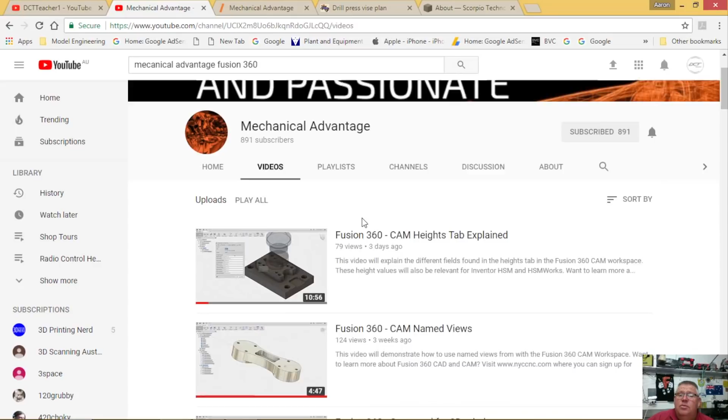So Kevin also has a website. What we're going to do together with Kevin and myself: I'll teach you how to draw this in CAD. Kevin's channel will take it back to his channel and he'll show you how to cam this. It will come back to my channel and we'll CNC machine this either on the Skyfire here or I'll go to work and CNC machine it on the Haas.

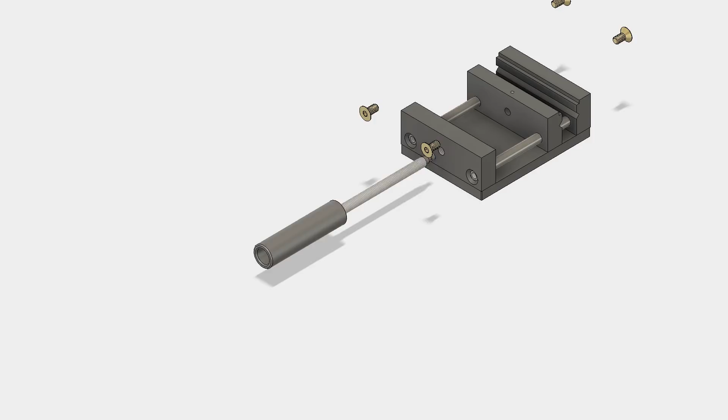Okay, let's get started. Step 1 will be drawing the base. Step 2 will be drawing the fixed jaw, the front. Step 3 will be the rear jaw, sliding jaw, and then the two rails.

So let's get started, we're going to open a new design. Before we start, I want to ensure that you're pretty much following me step by step. I like to design in Z-up, you can see here I've got my Z-up. And I also like to document my units in millimeters, okay, not imperial.

So what we're going to do now is click Save, and I'm going to make sure I'm saving this in my Fusion Fortnight folder. And there it is there. We're going to title this one CNC Vice.

Save it. Okay, straight off the bat here, guys, we're going to design a little bit differently to what I've usually been doing, and I need to credit Scott Moyse for showing me this tip. I'll put a link to Scott's video down in my description file. I highly recommend you watch it. It'll be the best 40-minute session of Fusion 360 tips you'll ever see in your life. So it's certainly changed the way that I've designed now with Fusion 360.

So we're going to create an assembly straight off the bat. Each time I create a new assembly, I'm going to make sure that I'm creating it under this parent file here. And I'm going to name my first component base.

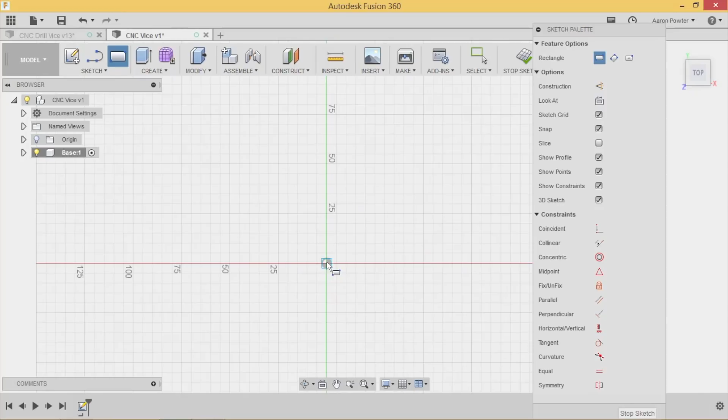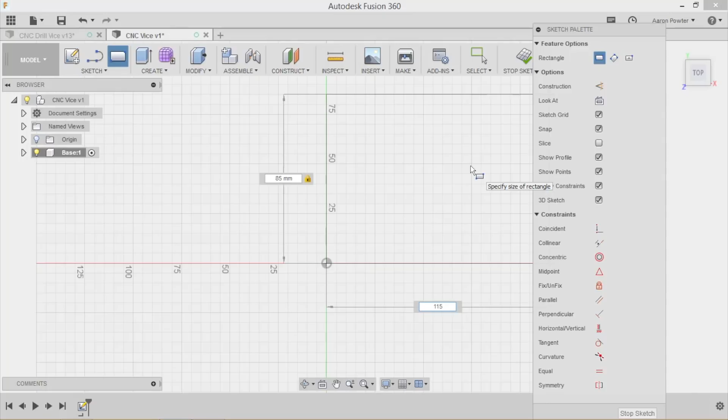So we're going to create a new sketch, click the ground plane, R for rectangle, and I'm going to be moving rather quickly throughout this video. So if you get stuck, just remember to pause the video, rewind it, and catch up that way. Before I terminate that rectangle, I'm going to type in my dimensions: it's going to be 85 millimeters wide, 115 millimeters long, and enter. E for extrude, click the top face, 8 millimeters, up we go.

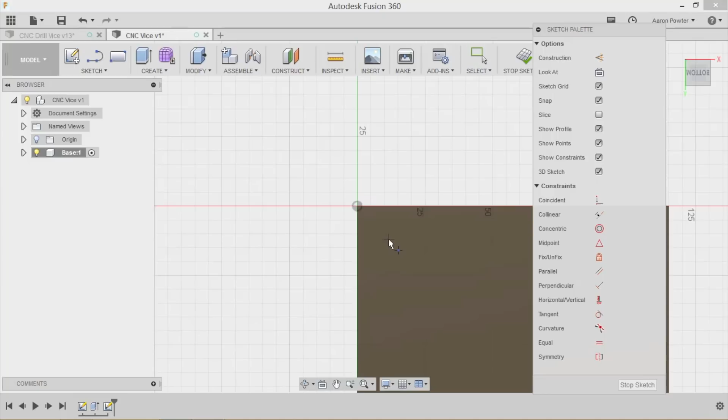I'm going to view onto the top view now and orientate it around to the bottom view. By using my scroll wheel, I can click and drag, and I can also zoom in and zoom out. I'm going to put some points on here now, so I select that face, expand the sketch drop-down section, click points. We're going to put 4 points on here, okay, just random points, 2, 3, 4.

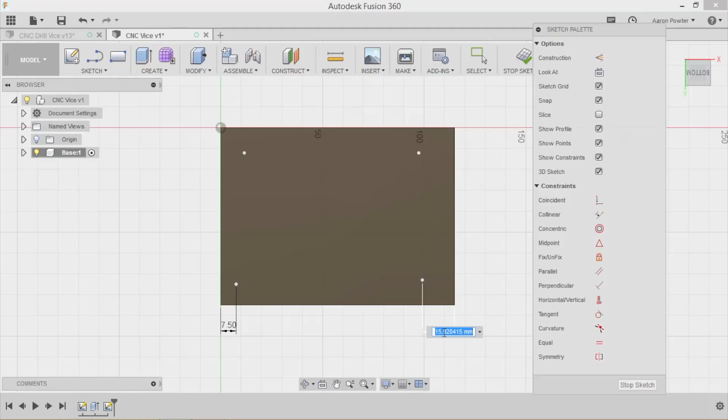And now let's lock these down with some dimensions. So D for dimension, and we're going to start just on this outside line here and coming down, and this will be 7.5. Let's apply that to the other side as well, 7.5. Okay, so now from the bottom line to that one out, that's going to be 17.5. And from this one here, escape, D for dimension, from that point to that point will be 50.

Now I'll tidy some of these up so you can see them better in the video. Okay, now you can see one of these points here is black. That means it's fully defined and will not move. The other ones you can see I can move them around, so we need to fix that.

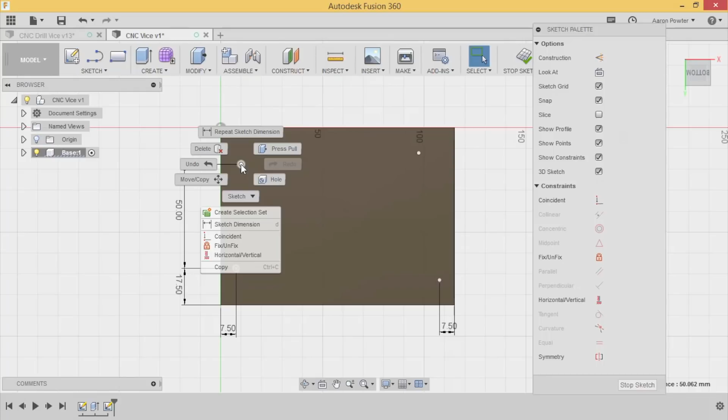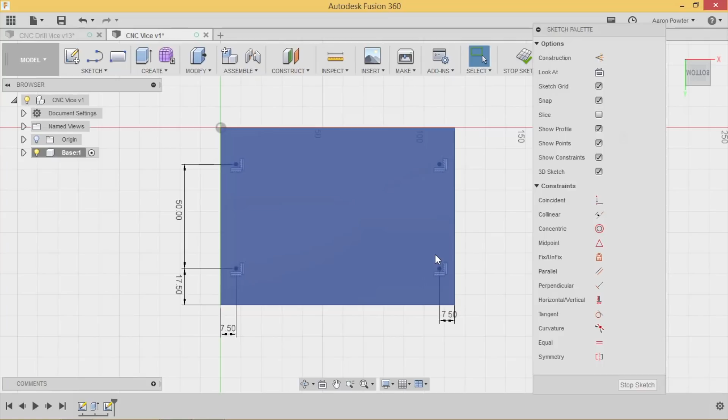I'm going to click that point, hold shift, click that point, right click and go horizontal vertical. Now that's turned black. I'll pick this one, shift, click that one, horizontal vertical. I'll align this one as well. Now you see I've got 3 out of 4 fully defined. The 4th one can still move here, but not up and down. So I'll click this one, hold shift, click that one, right click, horizontal vertical, and now these constraints are applied and they will not move.

We're going to use the create function here, click hole. In your hole, you want to make sure you pick multiple, okay? Come down, we want countersunk or countersink. Here we go, guys, we're going to click this one - 1, 2, 3, 4. Now the hole depth will be the thickness of the plate, so that'll be 8 mil.

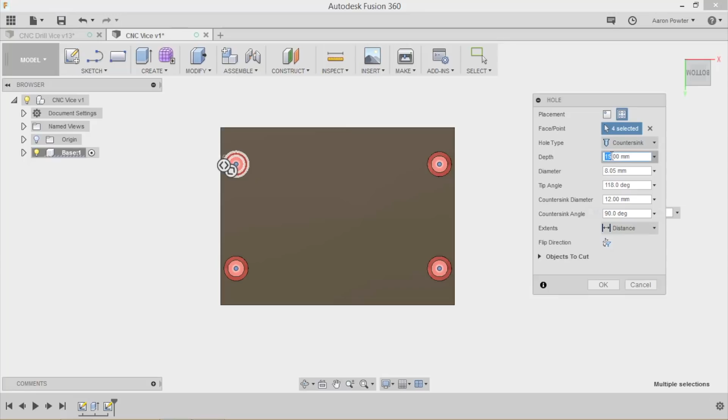The diameter here will be 8. The countersink diameter will be 12. Just check it as you come through - it's a 90 degree countersink, and we're going to click OK. You can see it is applied now.

I'm ready to go. Click save, guys. Okay, so we're ready now to start on the fixed jaw, the front fixed jaw.

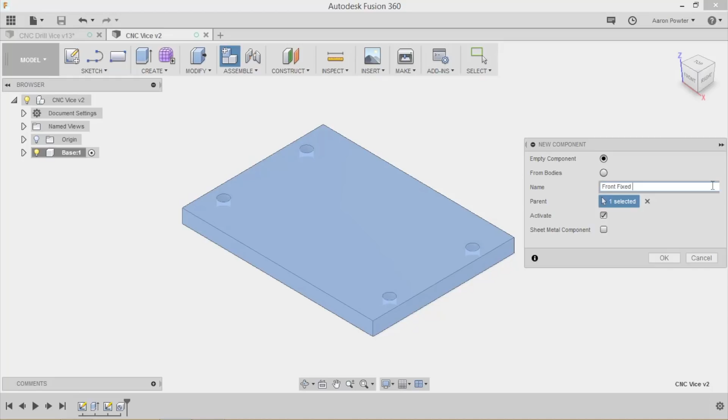To do that, we need to click create a new component. Now remember, where we see at the moment, it's selected the base here. I'm not going to do that. If I was doing sub-assemblies, I'd leave that. I close that, come back up to this top level here to CNC Vice the actual master file. Now I'm going to name it front fixed jaw and click OK.

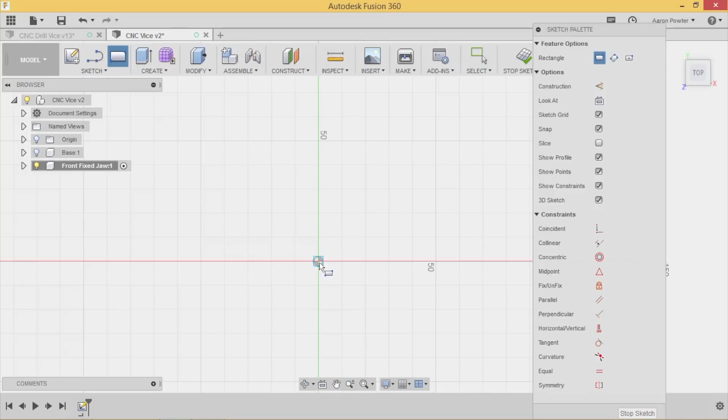Okay, so now I'm just going to turn off this, at the moment it doesn't really matter. Click a new sketch, click off that light bulb, click off the base so we can see what we're doing here. We're going to do R for rectangle and come up this way. This is going to be 85 millimeters long by 15 mil. Tab, enter, E for extrusion, click that, it's going to be 30 millimeters upright.

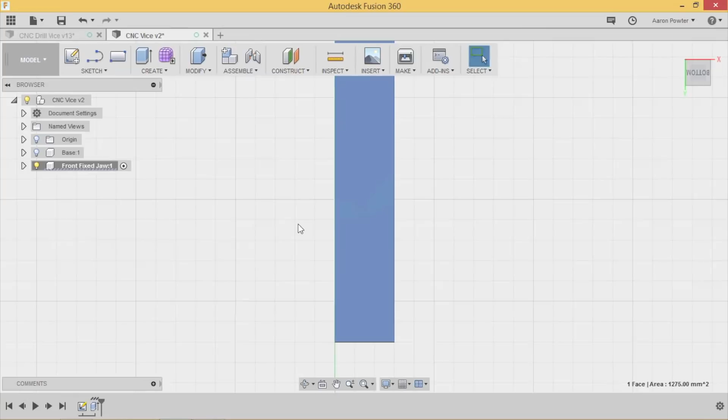We're going to come around now, guys, and underneath here I want to get to the base and put 2 holes in here, alright? So I'm going to click that face and it turns blue - notice that, click the face, turns blue, C for circle, and there you go. It's spun the other way on me, but that doesn't matter, we'll just carry on here, like that. I'll rotate that for a second so it's easier to see in landscape view.

D for dimension, distance between the holes - that's going to be 50 to match the base. Okay, from this edge to that edge, to the dot, to the center of the hole, that's going to be 17.5.

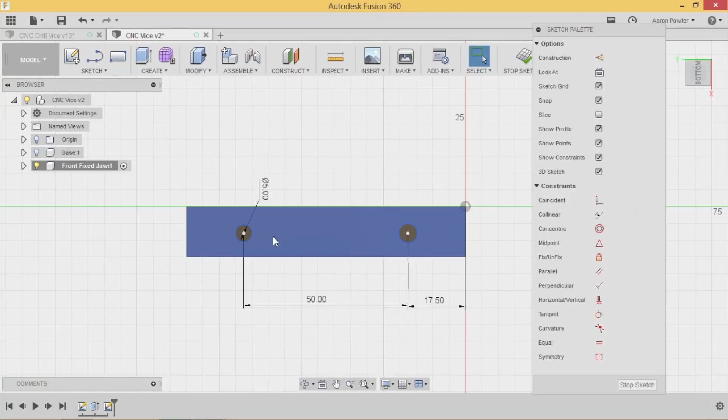Now we need to dimension the hole. Because it's going to be a threaded hole at 6 millimeters metric, we want a 5 mil diameter, and I'm not going to dimension this one. I'm just going to put a relationship between the two. I pick that outside diameter, hold my shift key, pick that outside diameter, we want equals, and you'll see now they're both right. But there's one thing I haven't done.

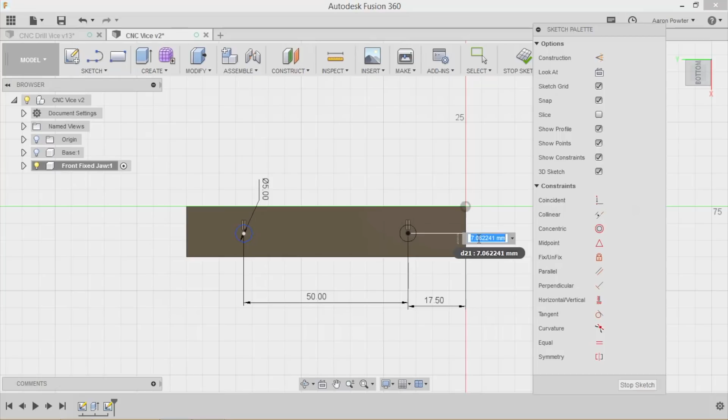You'll notice these dots in the center of the circle are still white. That means if I grab them, I can move them up and down. So let's lock this one down here. That should be 7.5 because it's half of 15. Now you'll see that it's fully defined, it's gone black. So I'm going to pick that center, hold shift, pick that one, right click, horizontal vertical, bang. Let's tidy up my dimensions.

Okay, E for extrusion, I'm going to pick this hole and that hole. Going back to my home view, my ISO view, and I'm going to go negative 15.

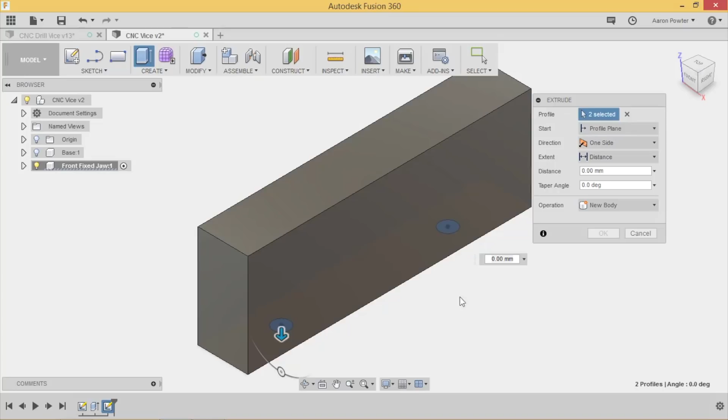-15, and there we have it. Now if I come underneath here, you can see I've got the 2 holes, but we need to thread those, okay? So here we go.

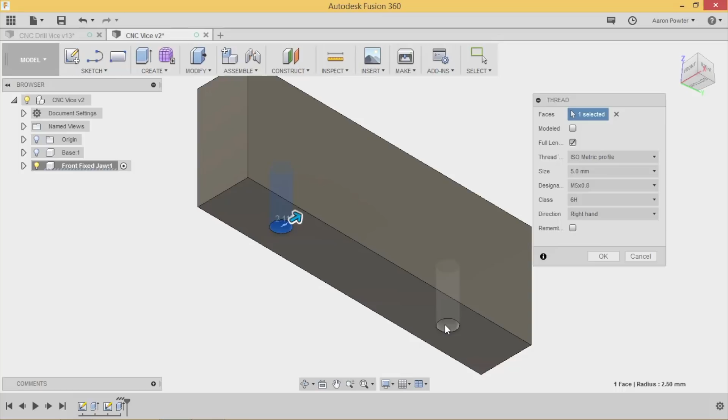We're going to create a thread. We're going to pick that one. Notice I can't pick this one here, but if I hold my control key, I can. See that? I can't select it. Control key down, bang, got it. We're going to make sure this is metric. As we come down, ISO metric profile, 5mm, M5x0.8, right-handed thread. Click OK. I just want that cosmetic thread, I don't actually want it to show the actual revolved cut thread there.

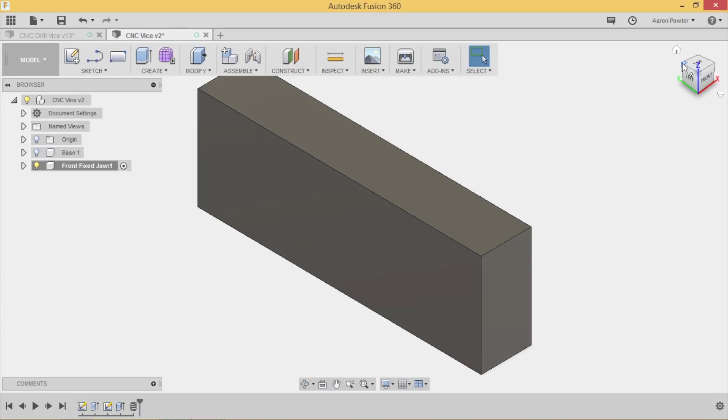Back to my home view. Now I'm going to come around to my left side, and I'm going to start with my 2 countersunks on this one here, and you can see it here, guys. I'm drawing this fixed jaw, and I want those countersunk features put on there. So here we go.

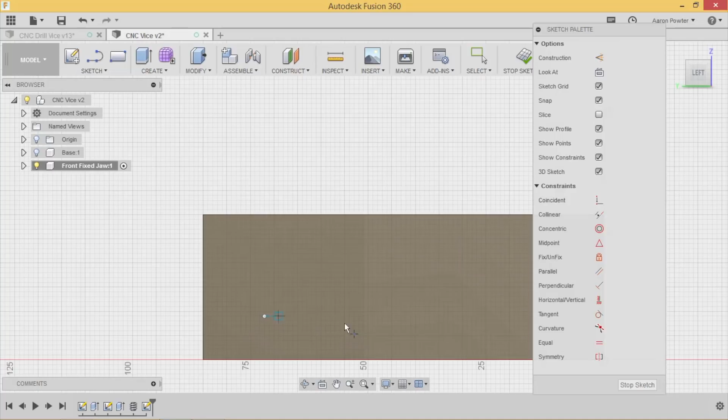I've selected that front face, and I'm going to use 2 points again. I find working with points a lot easier to do and to manage with these countersunk holes. So from here, that's going to be 10mm, put a dimension on there, D for dimension, click the edge and click out. From point to point now, yeah, it's going to be 65.

Now, if you're making this manually, measuring it out and center punching it on the workbench, that sort of thing, this is poor designing, okay? You'd always measure from a datum and come across, but being in CAD, guys, it's that accurate. We can pick point to point here, it's not a problem. Bottom of the line to that point there, and that's going to be 8mm. You can see that black dot there that's changed.

Now, Lars points this out all the time in his videos, guys, make sure you fully define your sketches, all right? So click that dot, hold the shift key, click that dot, right click, horizontal vertical, boom, they're locked down. Once again, let's put 2 countersunk holes on there.

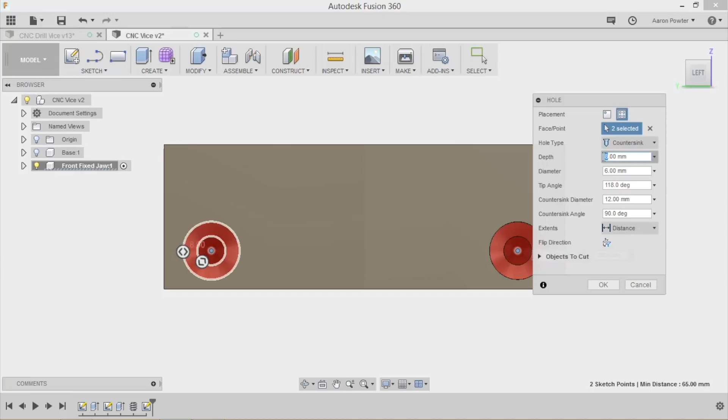So we go hole option, multiple countersunk. I'm going to pick that one and that one. Now, a few things have to change here. The hole depth will be 15. The diameter here will be 8.05.

Don't you love metric? Kevin, my good friend Kevin Ellingson, if you're watching, one day, mate, you'll see the light and you'll come over to the dark side and over to the metric system.

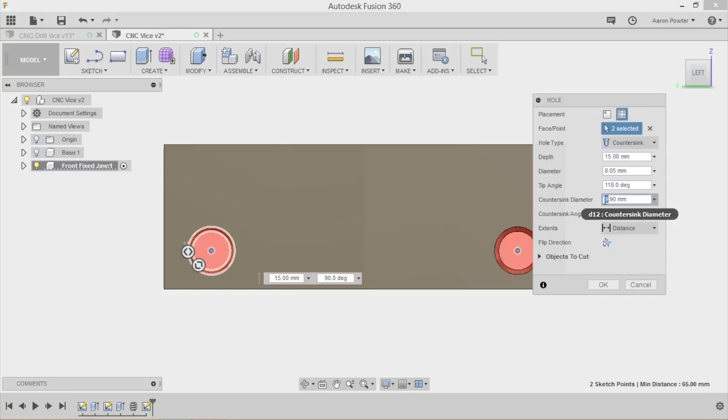For those of you that don't know, Kevin runs a channel called Mechanical Advantage, and he'll be helping us with this project doing the cam, and then it will come back to me, and we'll collaborate on this video, and I'll CNC machine it. Okay, guys, so I'm pretty happy with that.

And boom, there we have it. You can see here, but what's missing? If you look here, I need this threaded hole here. This is where my threaded shaft will come through and actually push on the sliding jaw and shut it. Just so you can see that, if I expand this, guys, and just go animate joint here, you can see that that's how I want that part to interact with myself, in my project.

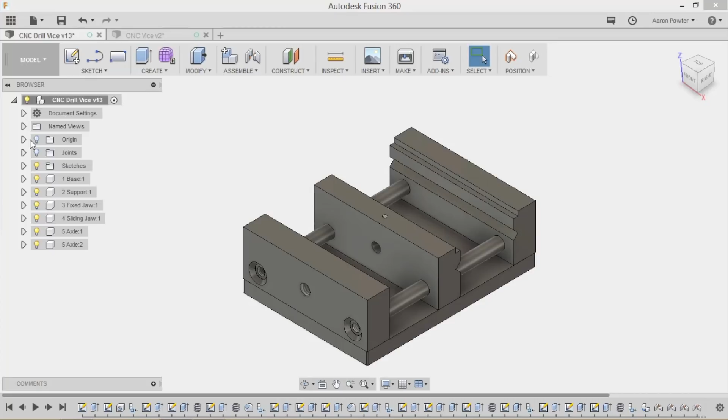Okay, so back up here, guys. Now remember, keep saving along the way.

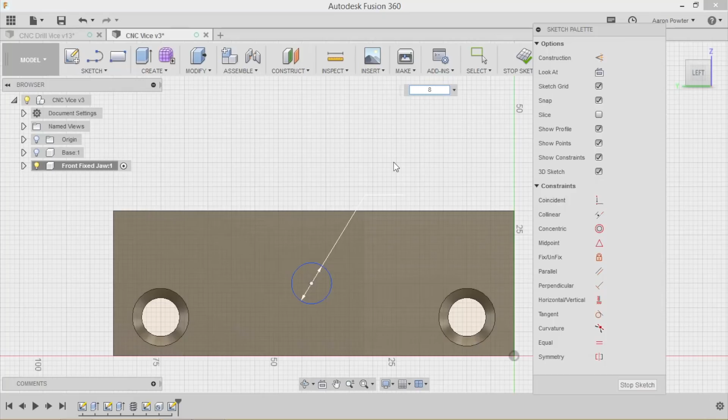Come back around to this left-hand view and select that face. We want C for circle, and we just want to put a circle right there. D for dimension, this will be 8mm metric thread. The pitch is 1.25, so 8 subtract the math here, if you don't want to do it in your head, 1.25, which should be 6.75 actually. Boom, 6.75. Gotta love Fusion.

It's fantastic, guys, I'm telling you what. I seem to be, how would you say it, an Autodesk Fusion 360 groupie these days. My wife says I've got a boring life, but anyway, I think I'm having great fun.

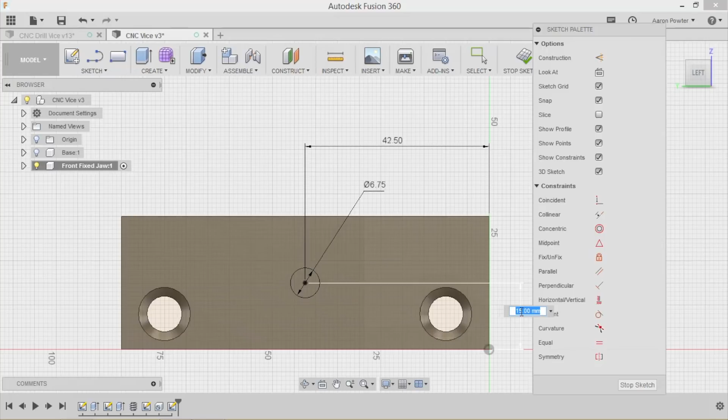42.5, guys, for the center of that hole, and we're going to have about 15mm up from the bottom here, and boom, spot on. E for extrude. I'm going to punch that all the way through. You can type in the value if you want, but I'm just going to pull it out till it goes -15, and it's a cut.

One more time, create a thread, ISO 8mm, 1.25 pitch. Boom, we've got it here. So that part's now complete.

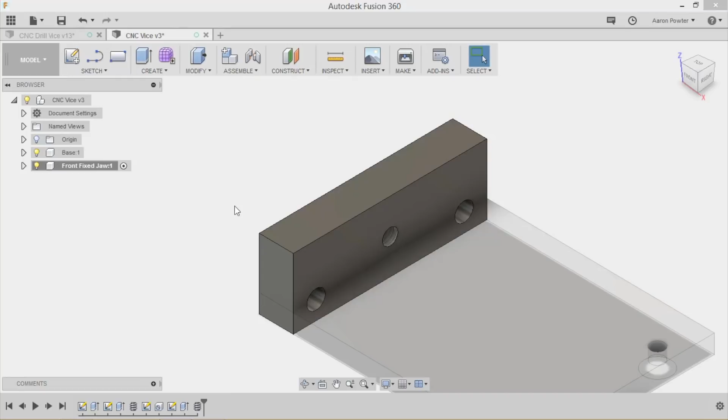Okay, so watch this, make sure you save it. Now the reason I'm getting you to design this way, creating your components as you go, there is a method behind my madness, guys, I can tell you. Now watch this.

If you come up to inspect and click component color cycle, you can also do this by Shift N, you can turn them on and off. How cool is that?

Now look down in your timeline. It will tell you where you started and show you which part is which. Now have a look over here - I didn't do this, and you can see it's this mess right across here. So thank you, Scott Moyse, for pointing that out. It's very handy.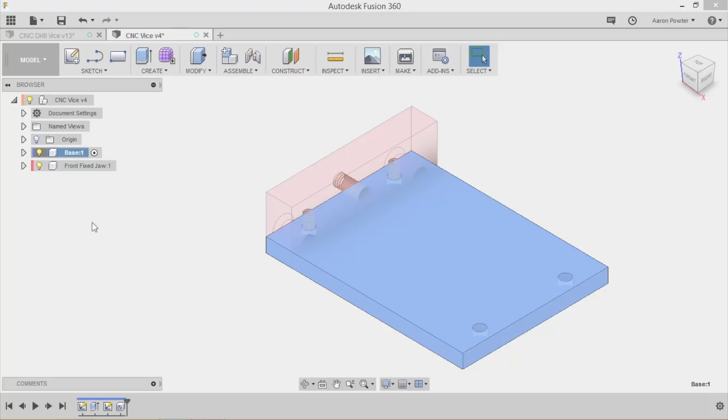Watch the fixed jaw, activate it, bang - everything is contained within that component. Anytime I want to go back and make changes, it makes it so much easier than trying to find your timeline down here and go, where the hell did I, where does this belong?

So yeah, thank you, Scott, for showing the error in my ways. Okay, so now that we've got the base and the first fixed jaw completed, we don't have to keep drawing these.

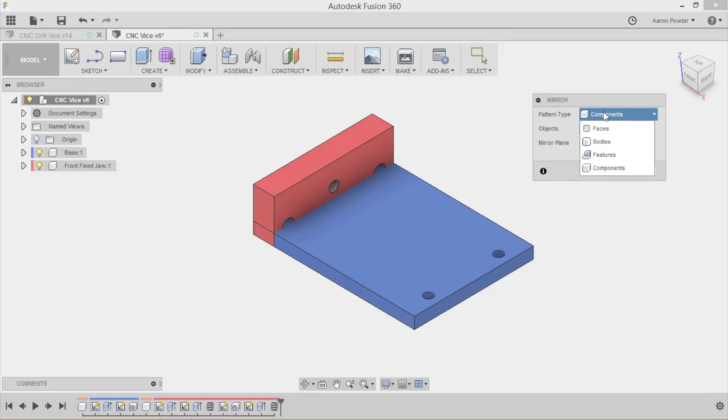We can actually start mirroring them. So what we're going to do is come up here to create, and I'm going to select mirror. In objects, I'm going to pick components, then pick this one here. Mirror plane, I'm just going to select that plane there and click OK. You can see my new component here - it's a different color, so I'm going to toggle that off. Remember, Shift N to toggle on and off.

So what I'm going to do now, guys, is turn the light bulb off on those other two to get rid of that. And here's my other fixed jaw, which will go to the rear of the vise. Now we don't need this hole in here, so I can click this here and delete it.

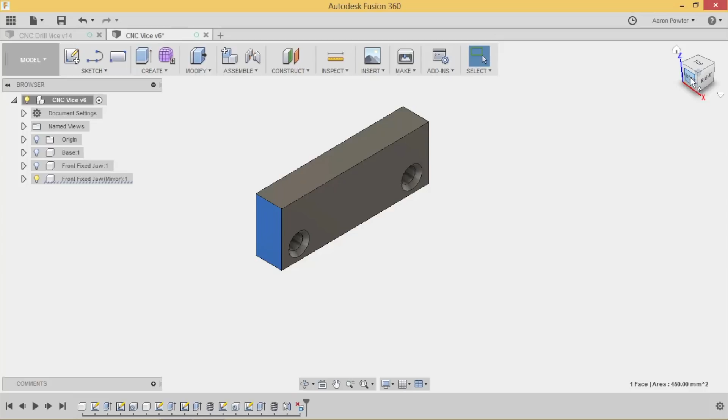We now need to put these little cutouts on here. So we're going to pick this face here, zoom in on the side, and turn on R for rectangle. We're going to go 3, tab, 3, tab, enter.

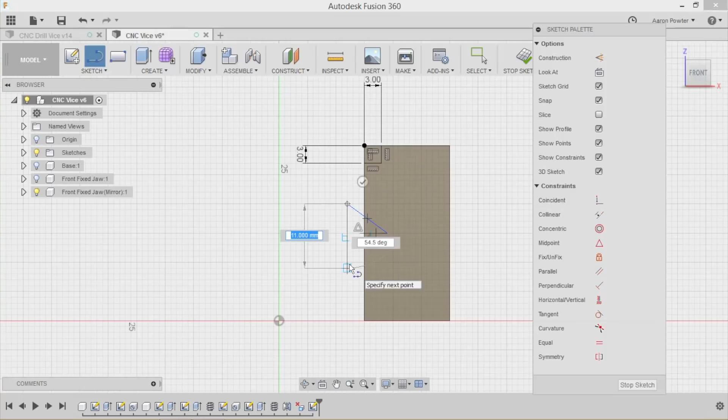From the center here, we're going to do a center line - just want to make a little V out to there, out, down and back, and put some dimensions on this. The center line there, I want roughly about 3 millimeters long as well. Oopsie daisy, we'll just edit that again, undo.

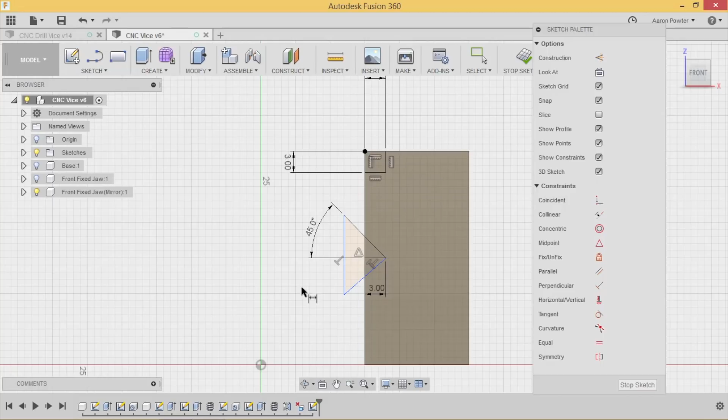That'll be 3. We need this one here to be 45 degrees, enter. And overall the degree will be 90 degrees from here, enter. Alright, so now we can extrude cut those all the way through.

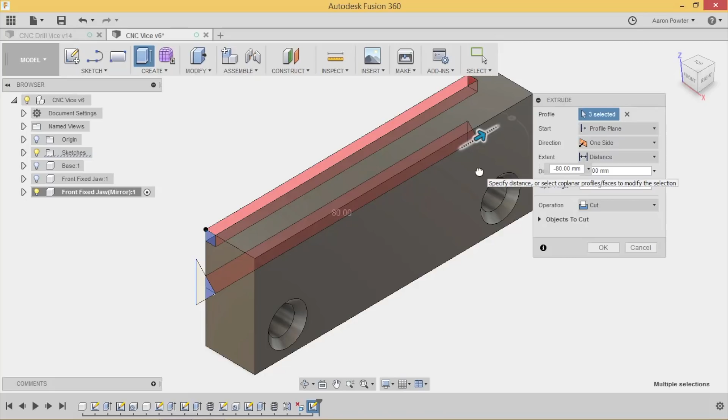So we're going to pick this shape here, bring it back up into our isometric view, and we want to go negative - I believe it's all the way through to 80. We can just check that by coming around, and we're clear. Click OK, back to our ISO view.

Click save. Now I can turn these lights back on here. You can see that I now have this fixed jaw for the other side done.

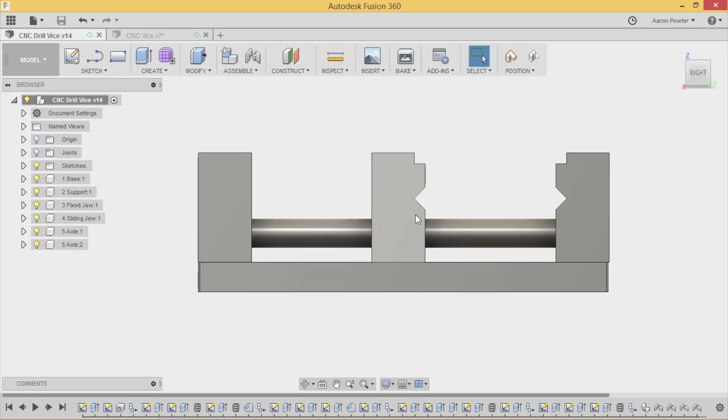Now what we can do is create a mirror of this one, and this will be our sliding jaw. So to have a look at this, you see we've got two fixed jaws, front and rear, and the middle sliding jaw, and that's going to be a mirror of this one.

And what we're going to have to do is just edit this hole a little bit, and it won't have a thread in it. So here we go - once again, create, mirror, pick this jaw. I'm going to come around for the mirror plane, want this face here, and click OK.

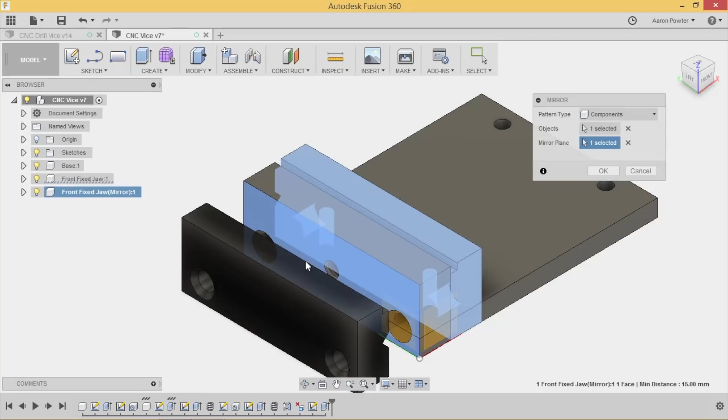Click on that face, C for circle, and we're just going to put a circle. We're going to snap a circle to the center there, D for dimension, and come up here, and that's going to be about a 6 millimeter hole.

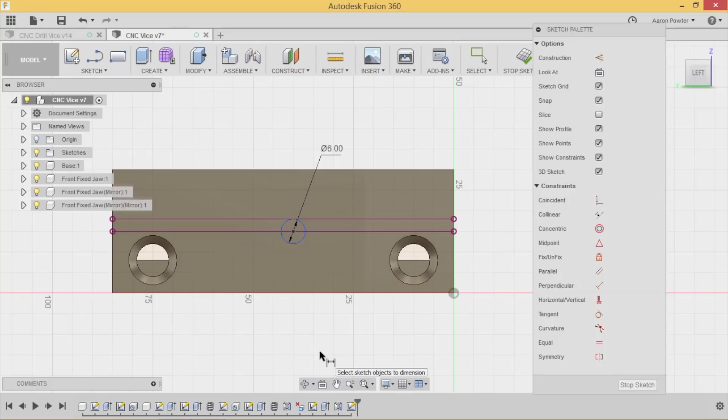And now we're going to use the center hole, so we need to center that hole in its location. From here, that will be 42.5, and to place it in the center as well, that will be 15. Oh yes, it's picked at the center, so okay.

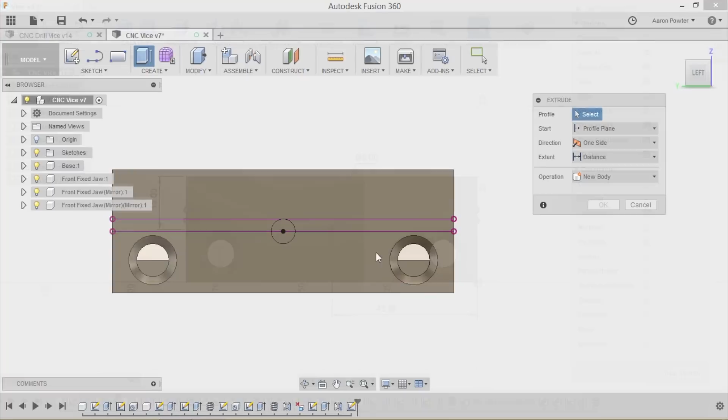E for extrude, we want this one here, and we're just going to go down in here for a second.

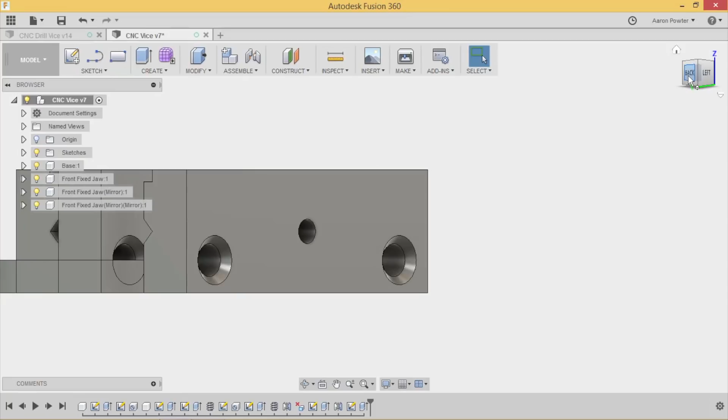And click OK. And there we have it, guys. So we just make sure that we haven't gone all the way through here. I think I have accidentally cut all the way through. Let's turn a couple of these off here just to make sure, and just view onto this front window here.

No, it's pretty safe, I can say now. If you wanted to check that, what you could do is come from here and turn on wireframe, so visual style with hidden, and you can see here that I'm quite away from that. So that's not too bad.

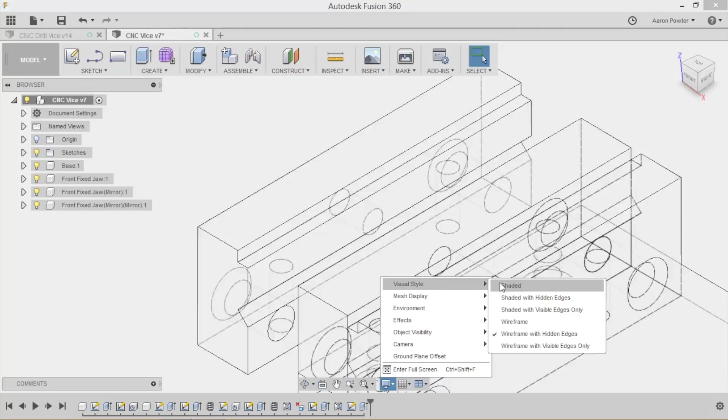Alrighty, so let's turn the wireframe back off now, and we'll go back to visual style shaded with visible edges. Okay, so we've fixed up our viewing. Now we can see everything here. If I want to toggle back on my components a different color, we can keep an eye on that.

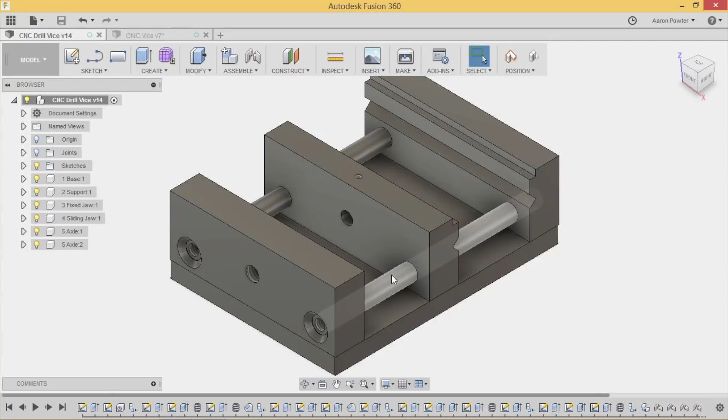So we need to create our axles here. Now they're going to be 111 millimeters long. So remember, once again, create a component, and I want it to stay under this design here, and this is going to be called axle. And create a sketch, and I'm going to turn these off just so they don't get in my way.

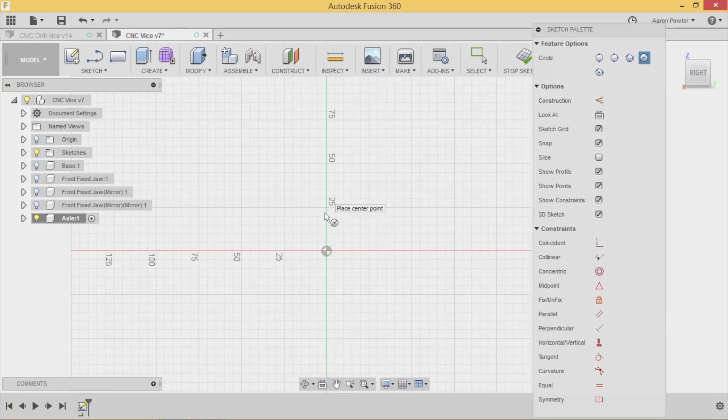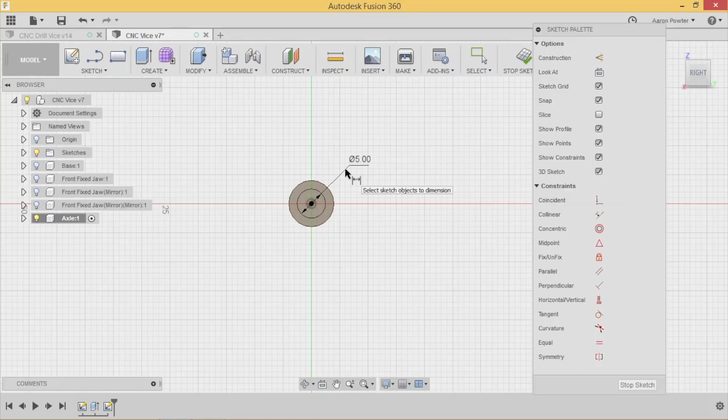C for circle, it's going to be 8 millimeter. Tab enter. E for extrude. 111. Enter. Click this front face. C for circle. And that's going to be a 6 mil tapped hole, so that'll be 5. E for extrude, and they'll go in -15.

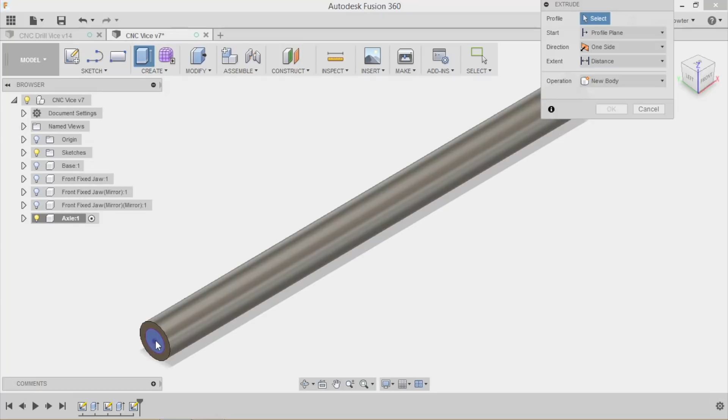And you want one of those on the other side as well. Five. E for extrude. And there would have been an easy way to do that. I should have done it like that.

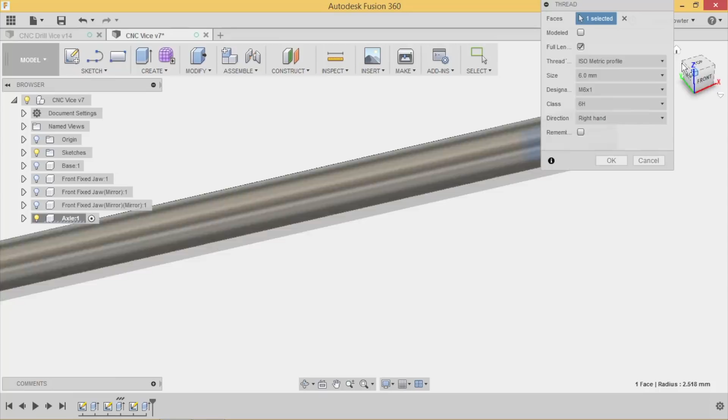Okay, so we're going to thread those now. Pick this one here, and metric M6 by 1 mil. Come around to the other side, hold my control key, and that will be the same. Click OK.

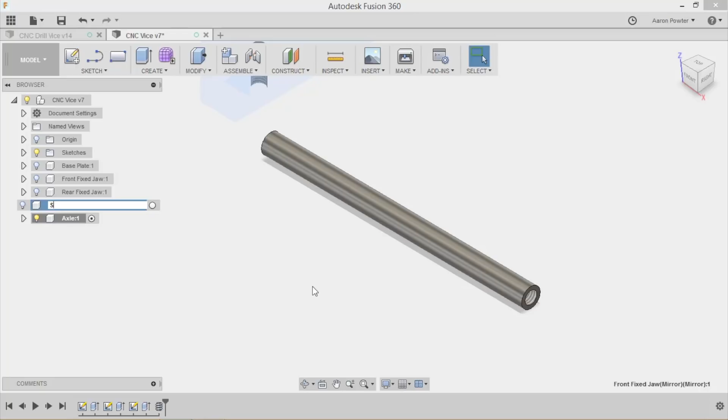So we need 2 of these axles. Before we do that though, let's just rename a couple of these. Okay, so we've got our base plate, a front fixed jaw, this one is our rear fixed jaw, and this one here is our sliding jaw. This will be axle 1.

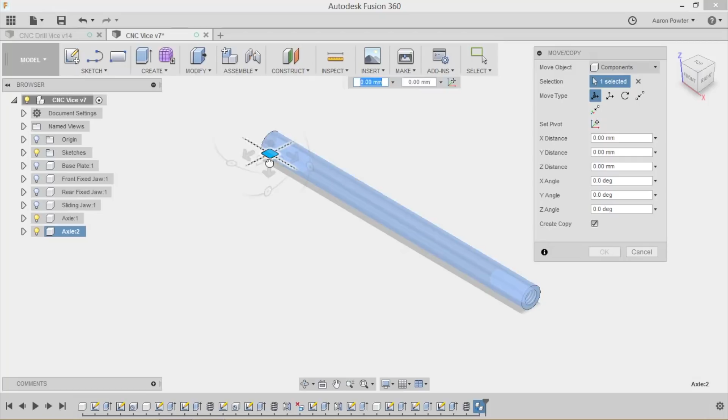Okay, to create a copy of this axle, we've got to deselect it. So we'll just go up to the top level here and select that. Now I can come down here and go move copy, component, you want to make sure we're picking this here, create a copy, and we're just going to pull it away, click OK, and you'll see it come up here now as axle 1 and 2.

Alrighty, so let's start assembling this. Now the best way to do this is turn on the front fixed jaw first. Okay, click joint. I'm going to orientate this around, and I want to get my coins coming up here, and I'm going to pick this front piece here.

Now, for component 2, we need to turn the base on, come back to my ISO view. I'm going to turn off my fixed jaw so I can see it. Here's my coins, they want to snap. Hold the control key, we want to snap it there. This will be a rigid joint, and you can see that there, that it's on.

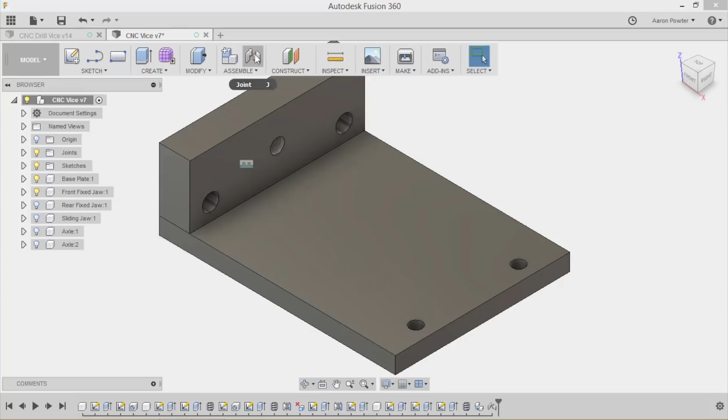We want to now fix this jaw here up this side here, so we're just going to repeat the process. Click joint, we're going to turn this one on. I'm going to turn the base off so I can see it. Orientate around, once again repeating what we've already done. Back up here, I'm going to turn my base plate on, and here's my coin, hold my control key, snap it down. It's going to be a rigid joint.

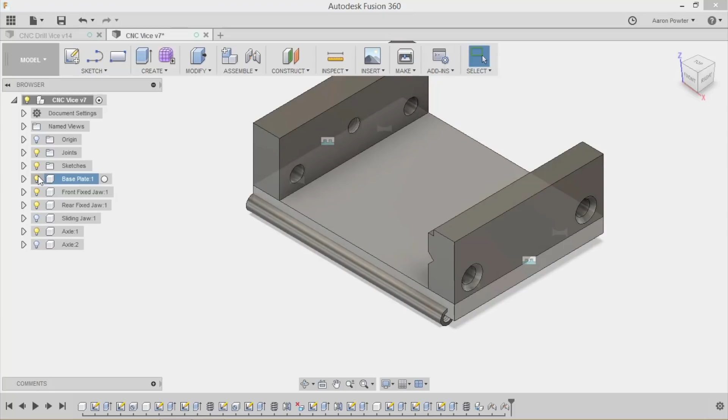Click OK. Okay, let's turn our axle on now. Let's put our axle in there. So you can see the base is hiding it, so let's turn the base off. Click joint, I'm going to touch this face here.

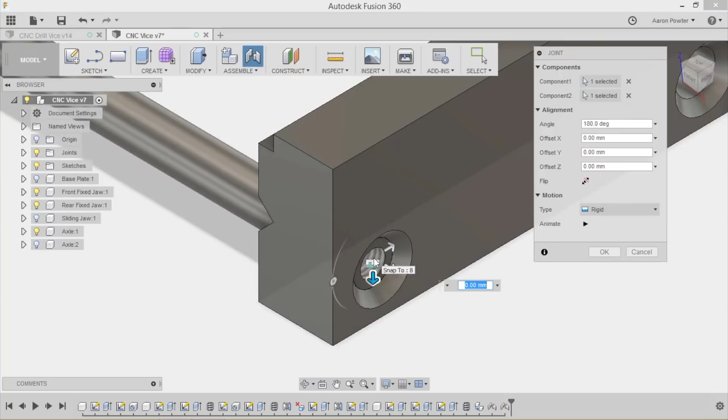Click joint, touch this face here, snap it to there. Here's my second one, and I want it to snap not there but there. Boom, there we have it. We're going to snap the other axle in now.

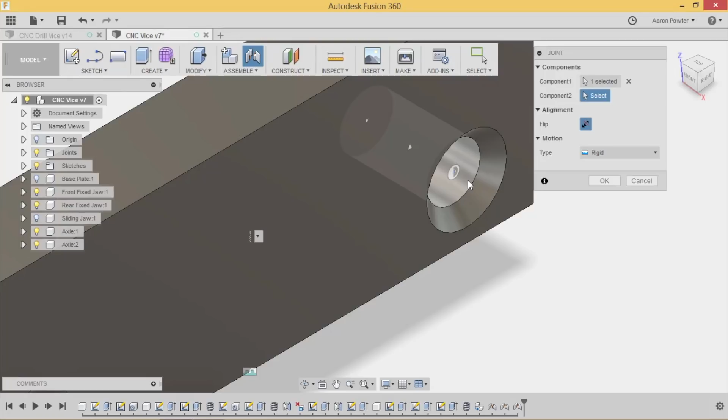Click joint, and touch that face, control key, come back out over to our other side, on the face there. If I just let go, I can see it, that's where I want it. Rigid joint as well. Turn my base back on.

You can see that now. I can toggle the components on, Shift N, and you can see they're coming in there now. I might just click the save button while we've gone this far.

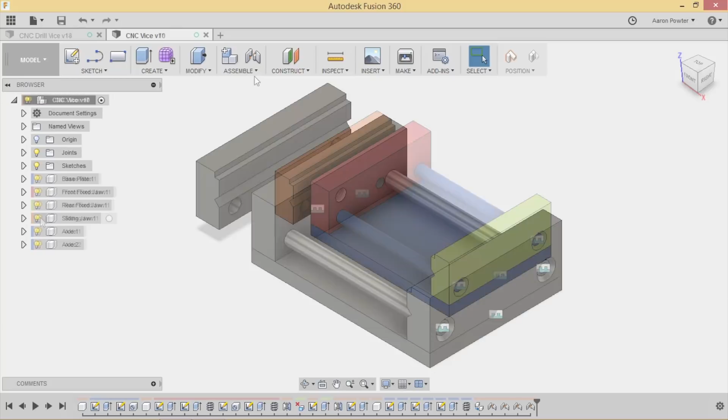Okay, so we need to put in the sliding jaw now. Click on joint, and we just want to continue here. We're going to touch this face here, hold the control key and pick up on that point, on the center point. Touch our shaft, the axle shaft, and you'll see it snap there now. And this joint needs to be a slider.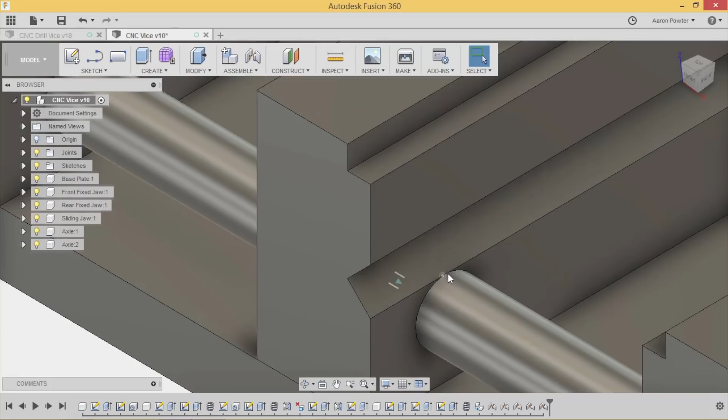And we'll click OK. Now, on closer inspection, you can see here that I haven't really put this V in the correct location, so let's go back and edit that. If you remember rightly, we would have edited this part here, so we're going to activate that part.

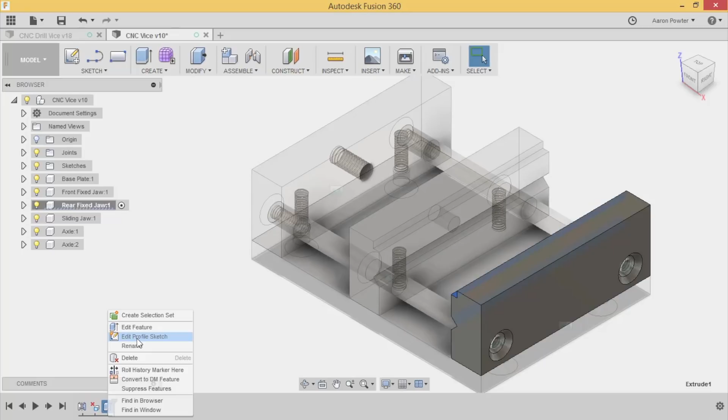Now, if you look down in the timeline, you can see that it's captured that design data down here. So we're going to right click on it and go Edit Profile Sketch. I'm going to zoom in, and I'm just going to turn my other pieces off here to get them out of the way. And this is what we need to do.

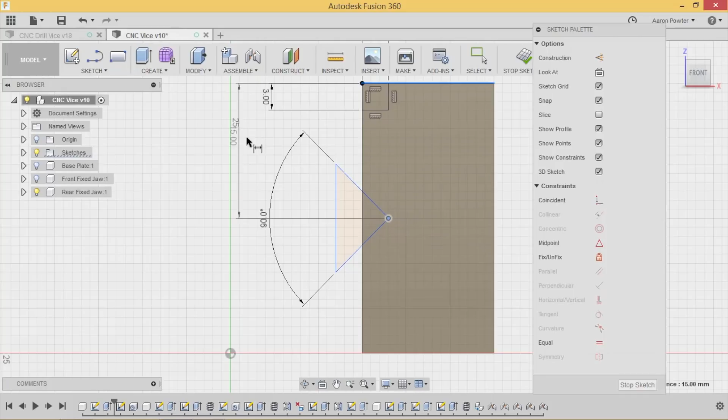So we're going to delete this line here. Zoom in a little bit. I'm going to delete that line. And now I'm going to put a dimension constraint from that point here, and I'm going to pull it up to 12.5. Then I'm going to accept it.

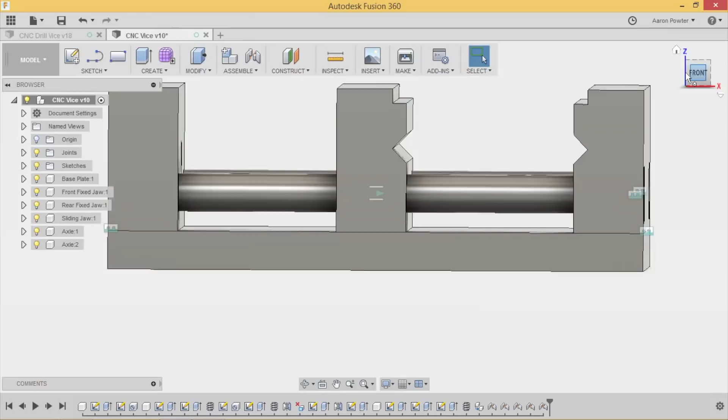And now when I turn it back on, and if I click at the top level here, you can see now that it's lifted that V up. Now, because I edited this part here, and this part here was a mirror, you can see it's reflected in both of those now. If we wanted to double check that, we could actually click on that joint and pull that in, and you can see they marry up together quite well, so that's fine. Put that back to the 0 position and escape.

Okay, so what you can do now, I'm going to drop this handle here that I made earlier. There are 3 parts that you can import into this, and I'll leave these URLs in the description area of this video. So the handle, what you'll do here, you'll download it, and in your folder you'll go upload, select file, go to your downloads, and then upload them into your project folder. Once you upload them into your project folder, you can insert them into your current design, so insert into current design.

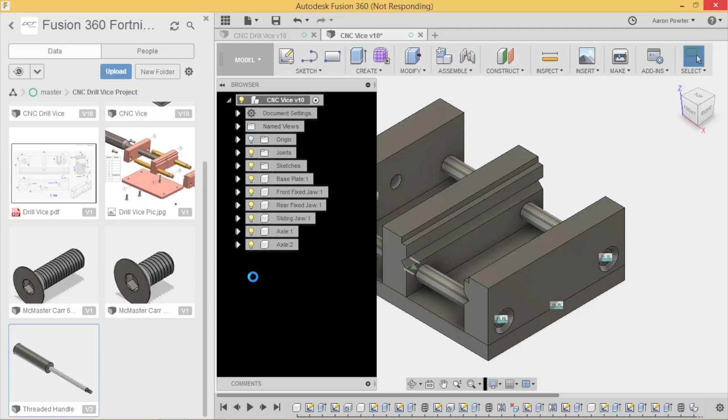And if we just wait a second, we'll pull it down from the cloud and stick it in there. There we have it, and we can orientate that ready to be assembled. I've already downloaded the McMaster Carr bolts here as well, so you can insert them into your current design. And what you'll want to do then is, using those joints that I've shown you, finish assembling your vise.

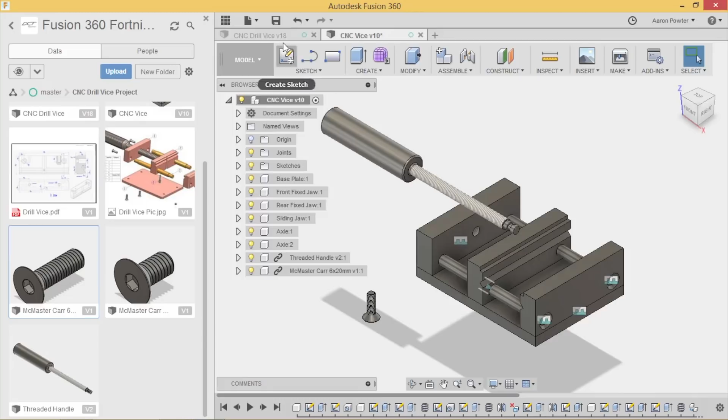To make it look like the one that I've done here. Let me just rotate this quickly to 180. And here's the completed vise. You see that I've put all the hardware in and I've put the handle. But there's one thing we haven't done yet, and this is this little 3mm hole that goes all the way down in here.

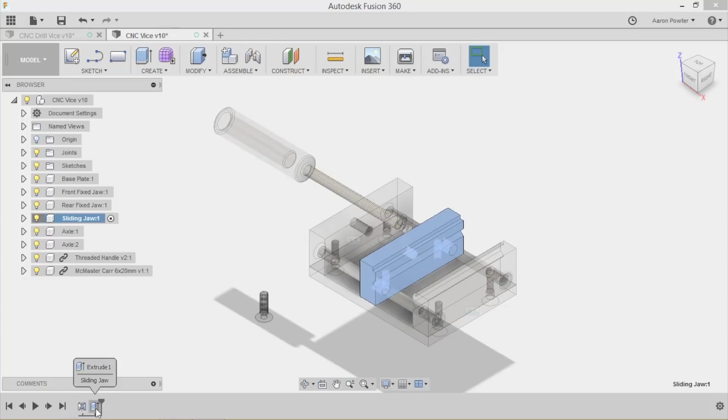Okay, so let's do that now really quickly. It's this part here we need to adjust, the sliding jaw. So we're going to turn that on, and only that design history comes up down here, which is fantastic. That's a great way to do it. I'm just going to turn these off so you don't get confused.

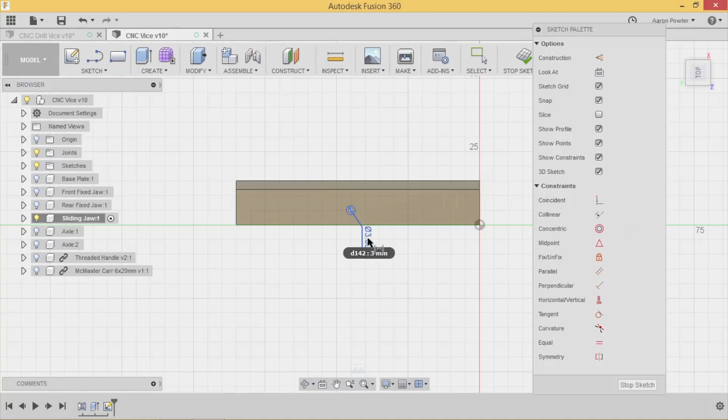Top view. I'm going to click that face, C for circle, orientate this around so we can see it. And it's going to be a 3mm circle. Then we've got to make sure that we've got it from here to there. That should only be 5mm, and it has to be in the center as well.

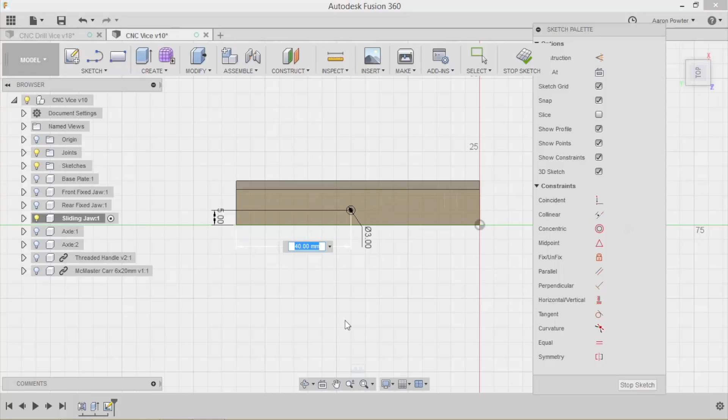And I'm pretty sure that it's 85, so 85 divided by 2 in the center. E for extrude. Up in the orientation, we're going to click that face, we're going to pull it down, and if we go around to the side here, we can actually see it drop into the cavity that we want. You can see it's cleared it, so I'm going to OK that. So that was a -10 extrude.

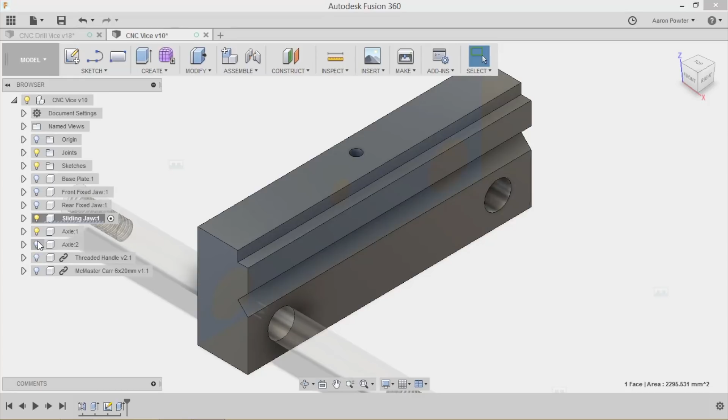And back in here now, back to my isometric view, turn all my parts on, and click on that top level there. And you can see now that when you build this vise yourself, you'll have a grub screw that will go down in there and that will lock that in.

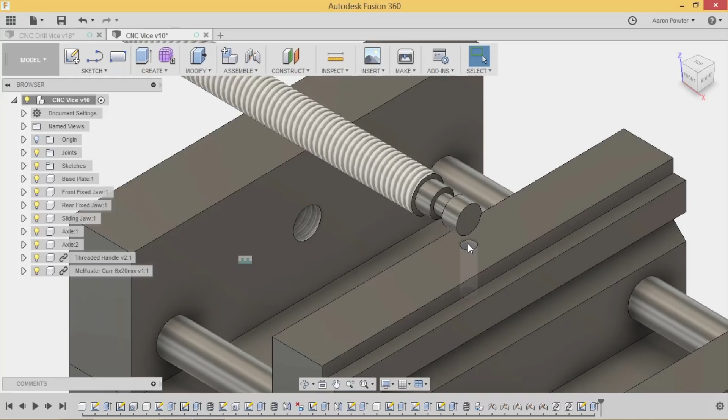So for a grub screw to fit in there, guys, remember, I actually need to put a thread in there. So let's just amend that really quickly. From here, create thread. I'm going to click that hole, and it's going to be 3mm ISO, boom. And back at the top level.